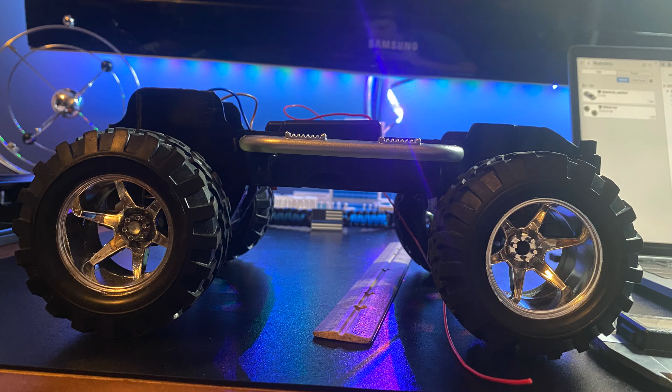I originally had the idea for designing an autonomous vehicle when I was taking apart one of my old RC cars. It could only drive 10 miles an hour and couldn't even be controlled autonomously. While creating an initial design, I had originally conceptualized the car to be small, a slowly crawling vehicle, and used as a UGV, unmanned ground vehicle, for my UAV team.

At the same time as I was planning all this, Tesla unveiled the Cybertruck, which at the time had a super stunning design. My team joked that putting a Cybertruck frame on our little UGV for the competition in the spring would be super fun, but little did we know that there would be no competition in the spring due to coronavirus. However, this gave me tons of time to start prototyping the vehicle, and it all gradually formed into the project that it is now, a fully autonomous mini Cybertruck that can also be controlled by remote control.

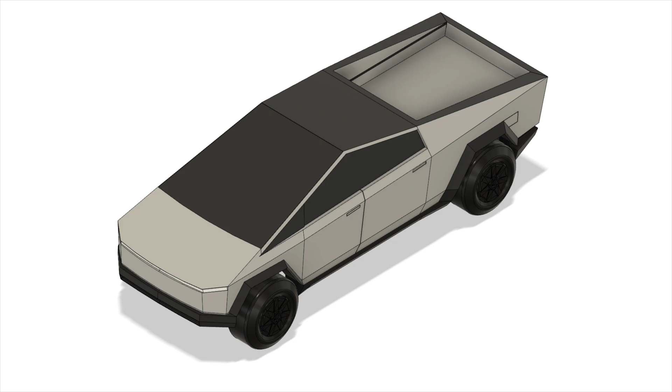The first thing I worked on was finding all the necessary parts for my vehicle. Reluctantly, I robbed my old RC car for all the parts. I stole 2 back wheels and an axle, 2 gears, as well as a steering mechanism from the front. Additionally, I had just purchased a 3D printer earlier that spring, so I knew a majority of my parts were going to be 3D printed out of PLA.

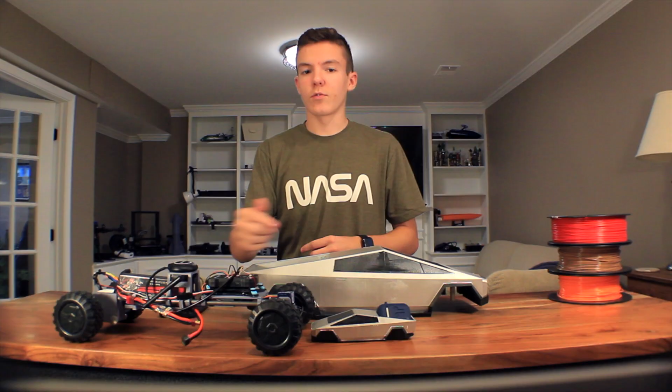However, I wanted a stronger material than PLA supporting the vehicle chassis. To accomplish this, I used 2 metal rods as the backbone of the vehicle. The steering mechanism in the front, as well as the gearbox in the end, would slide onto the rails. Additionally, the electronics and battery mounts and GPS would all slide onto the middle section.

Using the 2 rails also provided the vehicle with a little bit of torsion in stabilizing it as it went over bumps. Additionally, this platform would serve to remove the Cybertruck frame from the chassis. I did this with 2 clips and 2 guide rails the frame would slip onto to be mounted. This would keep the frame on during rapid accelerations, which it is definitely capable of.

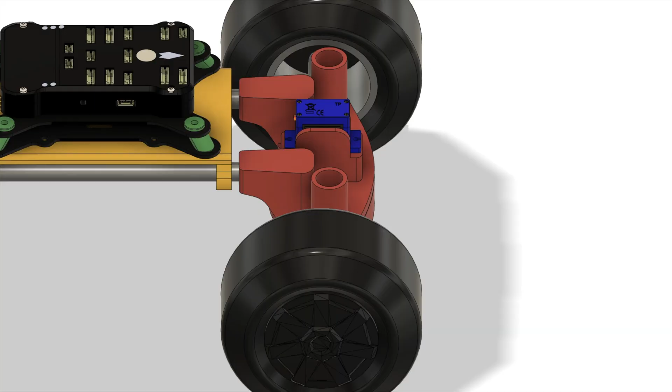After designing these parts, I finalized 5 chassis parts to be printed: the steering mechanism, the Pixhawk mount, the GPS mount, the battery mount, and the gearbox. Breaking the structure into these parts helps break up the print times, as well as cause less damage if a print failed.

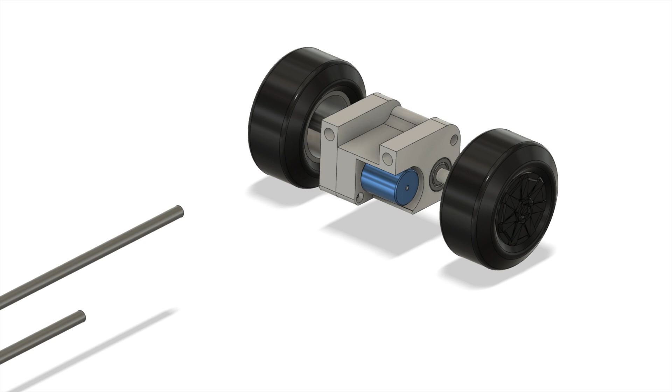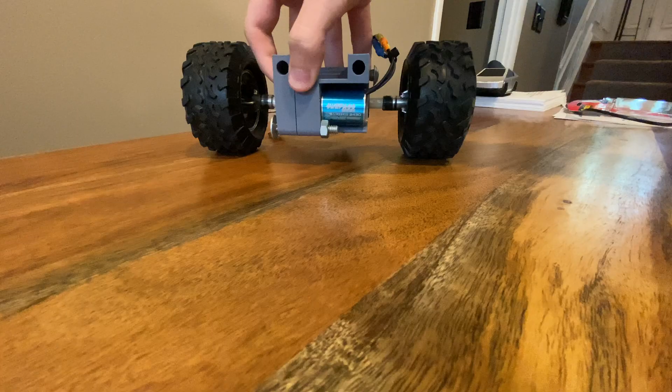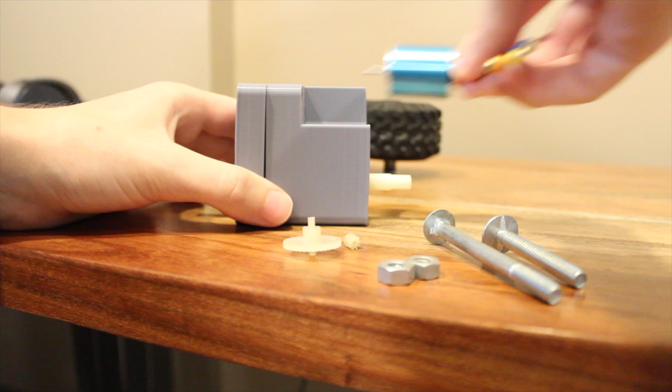Designing the gearbox was one of the most challenging parts of this project. Not only did it have to keep up with the intense heat and friction of the gears spinning, but it also had to last for a long time like this. My entire need for a gearbox came down to using a motor that was way too powerful. I originally intended the vehicle to only travel at a max speed of around 5 miles an hour, but I soon became aware that even gearing the motor down as far as I could, even a 16:1 ratio, it would still travel upwards of 6 times this, up to 30 miles an hour.

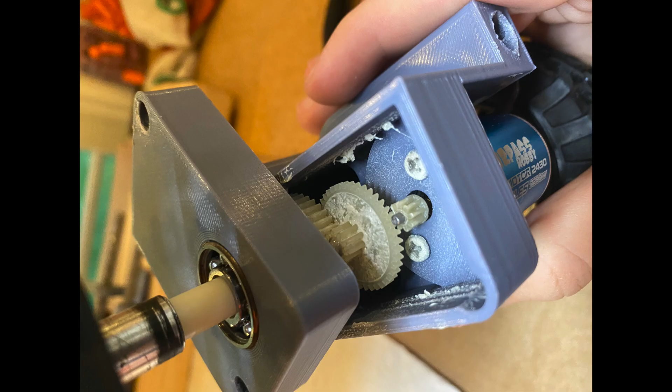The main issue I had with the gearbox was the intermediate gear in between the motor shaft and the axle. In initial designs, this was fully mounted in plastic, or PLA, but as 2 failed field tests showed, the plastic kept getting melted around the mounting point. Later, I replaced this with metal nuts, which seemed to fix the issue. Additionally, I added lots of grease to reduce the friction and the sound caused by the gearbox.

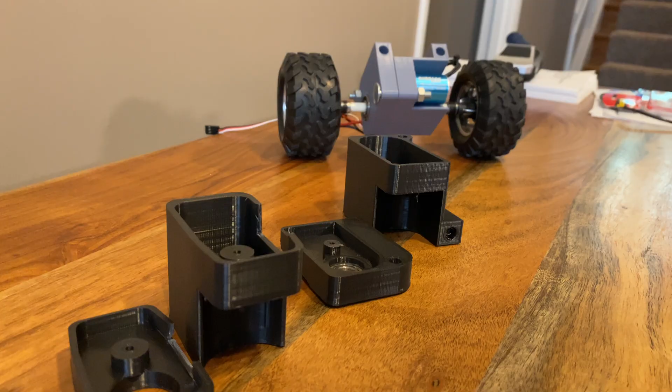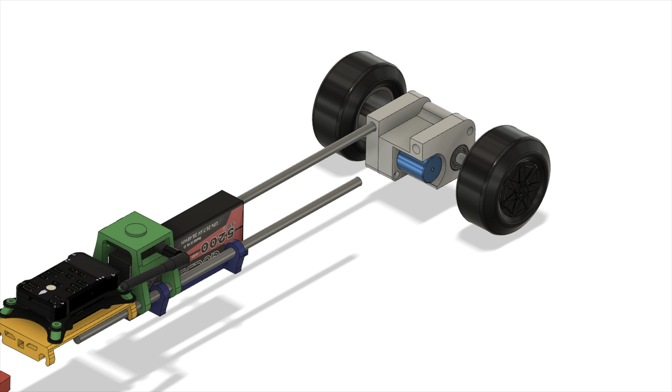All 3 gears were stolen from the old RC car, which was beneficial since they were molded to shape, not 3D printed. This meant they didn't break as easily as 3D printed ones could have. To connect the gearbox onto the rest of the chassis, the gearbox slides onto the end of the metal rods and is secured with hot glue. Overall, I am very proud of how this gearbox turned out and might even use it on future projects.

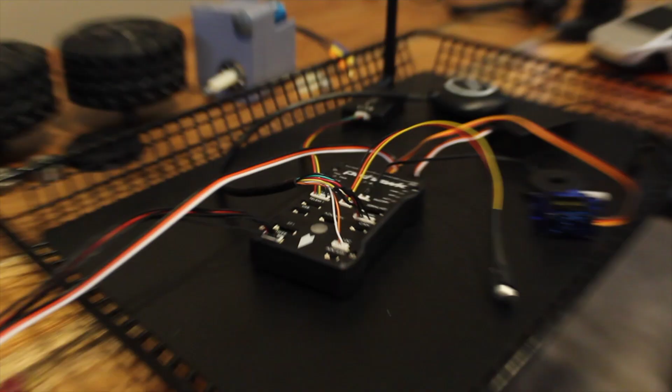As for the electronics, they're not super complicated. However, using a motor did make them a little bit more difficult. Here's a basic summary of what's going on. The Pixhawk is the flight computer on board the vehicle, which controls the outputs: 1 servo motor to steer, and 1 brushless motor to drive using PWM. However, since a brushless motor can't understand a pulse width modulation signal by itself, we use an ESC, electronic speed controller, to control the actual speed of the motor.

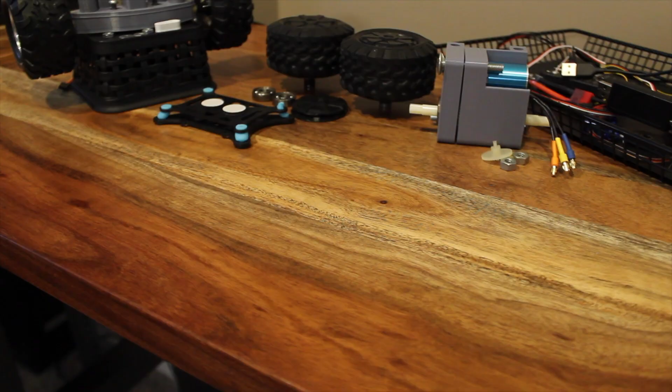To power all these onboard electronics, we need a battery. I use a 2-cell LiPo, which supplies 7.4 volts. Finally, for the vehicle to drive by itself, it needs to know where it is. To do this, we have a GPS, and to communicate back to the ground station, we have a telemetry radio. Normally, a person monitors the ground station, like a computer, and communicates with the car over a telemetry radio.

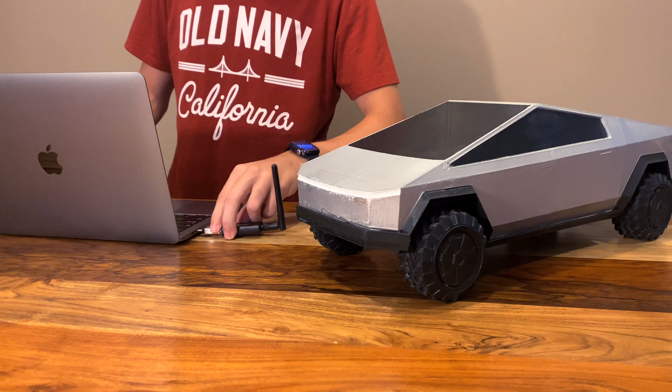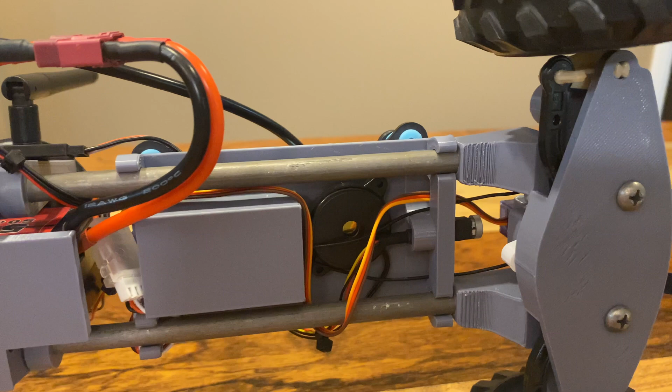To control it over RC, remote control, I also have a receiver underneath the Pixhawk mount at the bottom of the vehicle. Other than that, I added a safety switch to arm the vehicle and a buzzer so I know when the voltage of the battery is too low. All of these devices have a plethora of wires between them and are secured using zip ties.

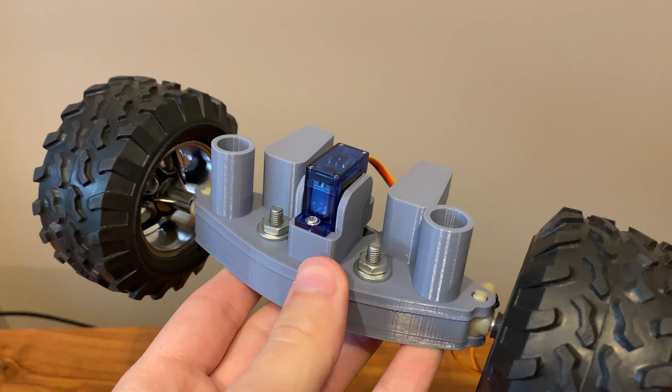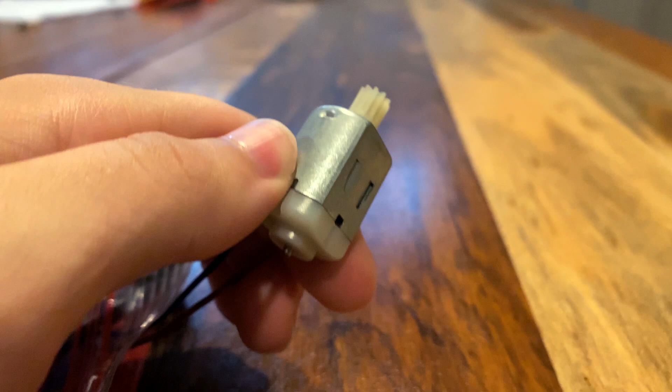The single source of control that I had on the steering mechanism was the use of a positional, not rotational servo motor. This was much different than the old steering mechanism, which used a brushed DC motor. However, there were some advantages. The old motor had to be geared down, while mine doesn't. I went through 4 prototypes before settling on my design, each of which progressively got better and more complicated.

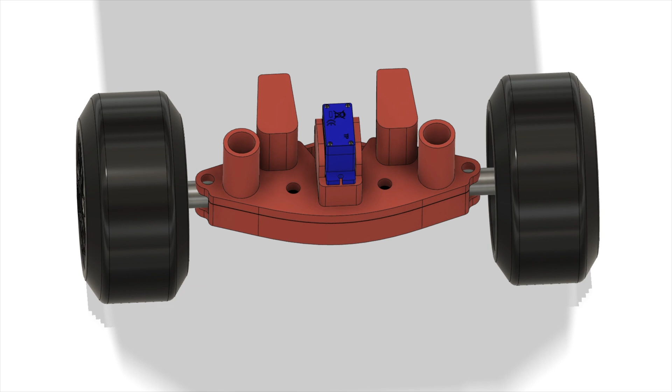Basically, this steering mount had 4 objectives. 1. Mount the servo to the steering mechanism. 2. Mount the wheels, allowing them to spin without interruption. 3. Slide onto the metal rods in the front of the truck. And 4. Allow the casing to be slid into these 2 mounts in the top.

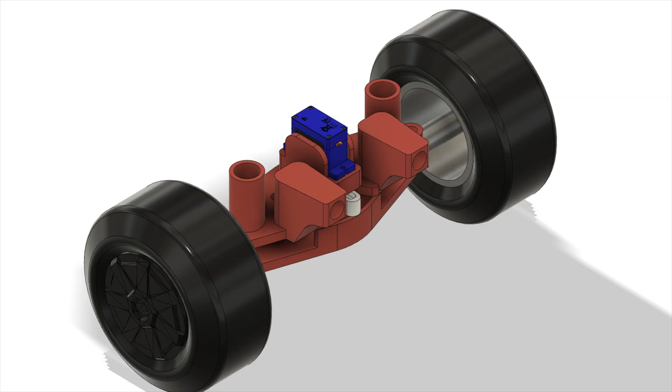I printed a custom servo head adapter to slide onto the old steering mechanism, and also screwed in the servo so it wouldn't move around while the car is turning. Although one of my concerns was that the small 9-gram servo wouldn't be powerful enough to turn the car, it's proven that it is. I'm very proud of this steering design. In the end, it allows the car to turn pretty sharply, but more importantly, it can drift.

Although this is technically the 3rd version of the UGV Cybertruck, I still have many ideas for how to improve it. Primarily, I would widen the distance between the metal rods. This would not only keep the vehicle more stable, but it would allow me more room for wiring and mounting the electronics. Just increasing the width by a little bit could allow me to mount the battery sideways, improving the clearance of the vehicle. Also, this would add more space for removing the battery, which does prove tricky at times.

More importantly, however, I would try to use more standard parts, like a standard threaded rod and bolts. For this project, I just used old bolts that I found in my garage. To better manufacture the Cybertruck frame, I would use a filler spray instead of Bondo. The Bondo worked well for large areas, but for example on the front, there are a few areas that got covered a little bit too much, and it made the front look bad.

Finally, I would redesign the gearbox to use metal gears, so that it could last longer. One of my main issues with the gearbox was that the plastic mounts kept melting under the extreme heat that the gears spinning provided them. Although with a metal gearbox the weight would increase, it's still a benefit to the vehicle. So yeah, that's it, the autonomous Cybertruck.